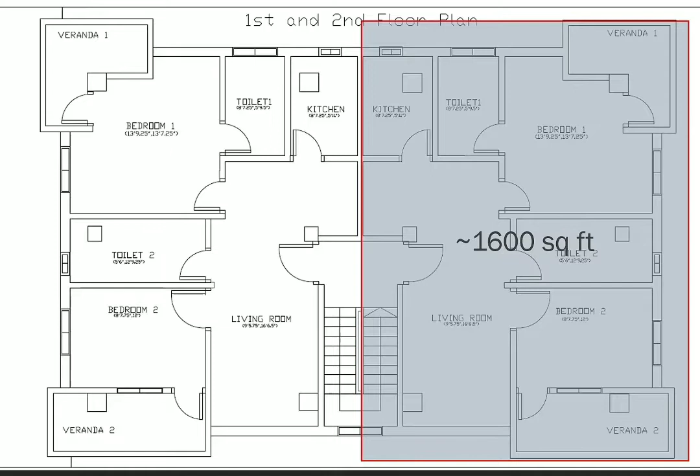For each unit, we have a master and a regular bed. We have two toilets, one kitchen, proper drawing and dining spaces. We keep a veranda and adequate windows for each room for proper ventilation. We also have stairs in this model.

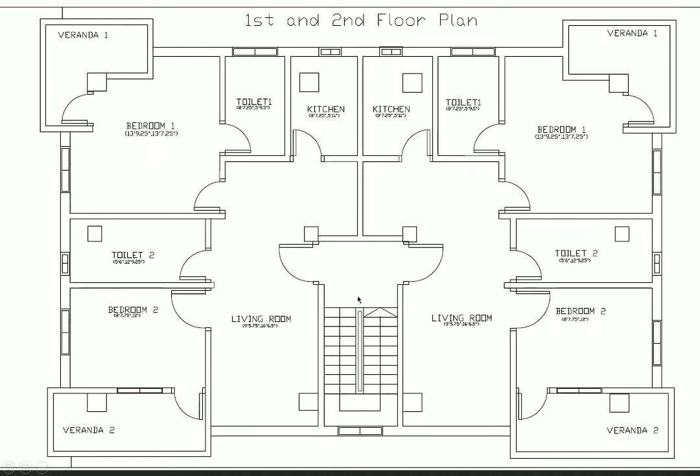Besides, in our ground floor, we are told to keep parking spaces for each flat. As we know, we need 17 feet by 20 feet free spaces for each car. We made only two big spaces for the cars. But we have more space to keep light vehicles like cycle, motorcycle, etc.

We also keep one guard room, one toilet room in basement. We also try to keep a sitting space beside our main gate.

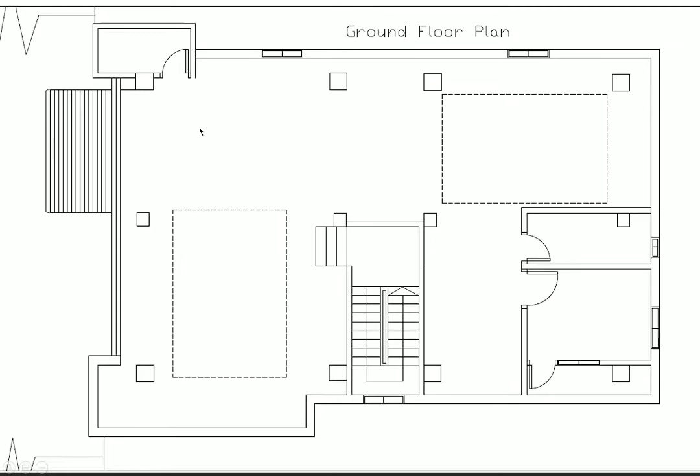We will proceed now to our next topic, which is fittings and fixtures. So an electrical fixture is a product that is used for fitting various electrical devices like lights, fans, etc. For example, wall brackets, switchboards and power sockets. An electrical fitting is any kind of electrical appliance that fits in various fixtures. Example, tube light, TV and electric fan, etc.

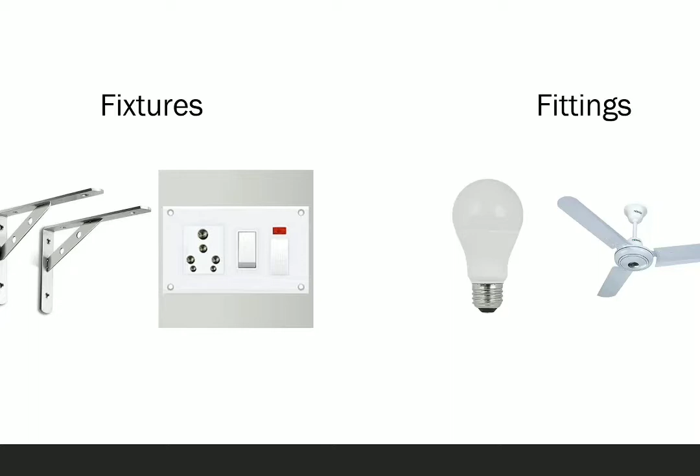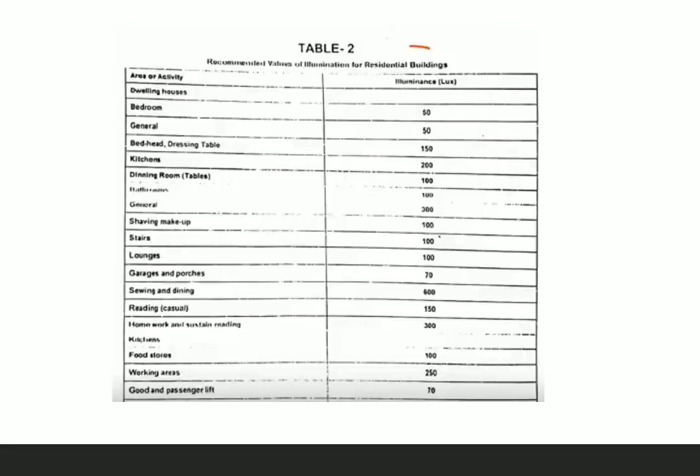So for fittings and fixtures, first of all, we measured the floor plan dimensions including height and width, etc. On the next step, we calculated the number of fittings. For this, we created an Excel file. So we checked on the recommended illuminance for different types of rooms. We used the data from EnergyPac's website for 12-watt bulbs and 18-watt tube lights for the wattage and the lumens, etc. The calculation of the number of lights and fans for each room was done using the formula in Excel.

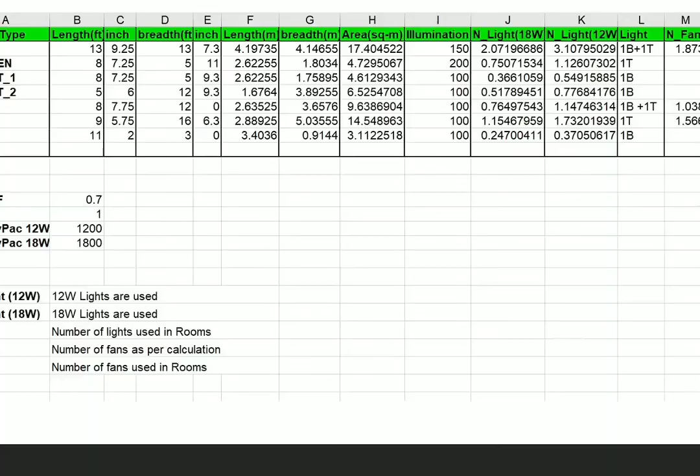So after finding the data, Ishani, ID 131, made the required symbols in AutoCAD to be placed on the floor plan. It is important to note that besides the mathematical results, we had to also take into account our observations of fittings and fixtures, like our surroundings and intuitions.

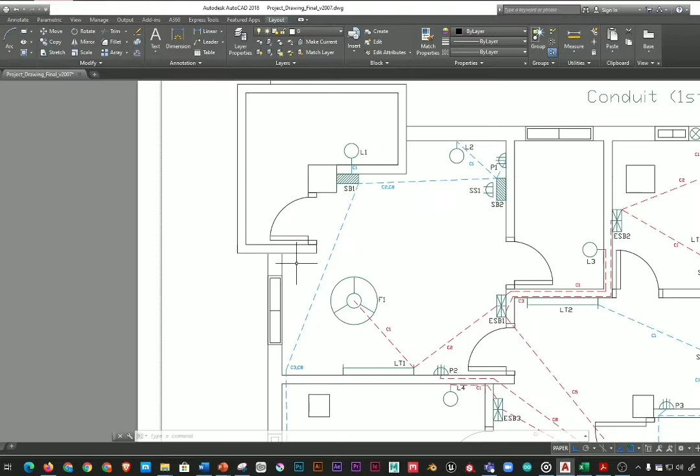For example, in this bedroom, the calculation gave us the result of 1.87 fans, but normally there is not more than one fan in a bedroom. So we placed the fan in the area of the bed and added some switchboard sockets or power sockets where a table can be placed, so that we can use a table fan there. So we took into account the same intuition for the rest of the rooms.

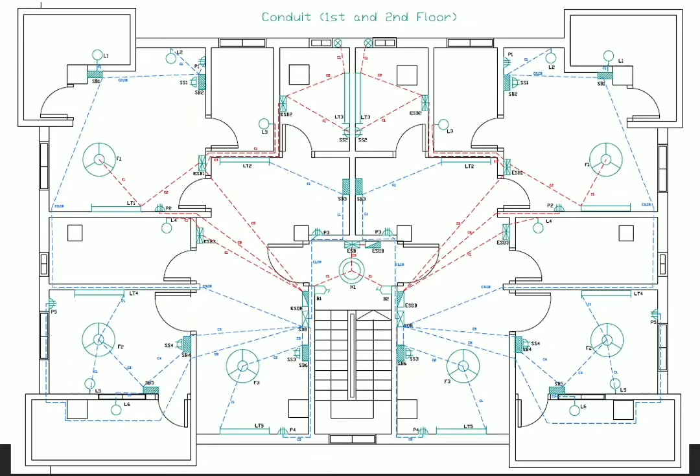We can see here the first floor and the second floor conduit design. SDB lines were colored blue while emergency lines were colored red. Our priority was a neat and clean design, and so we prioritized that two wires don't cross each other. Therefore, we drew wire connections from the walls. Sometimes we had to add switchboard connections with power socket connections due to limited space and maintaining a neat design.

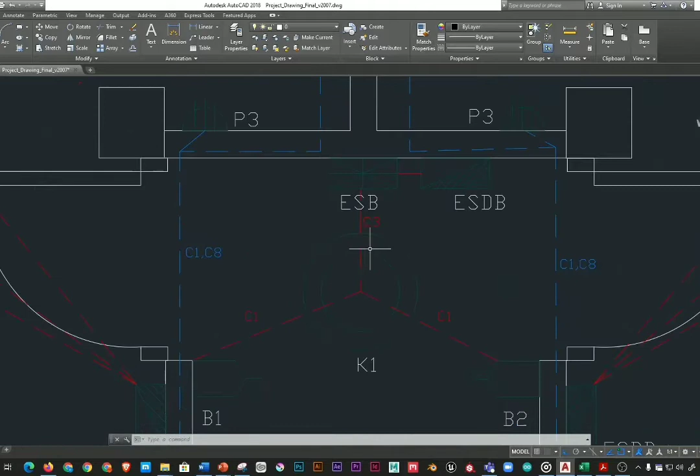Besides, wires of all security related lights and other appliances were connected to the ESDB. Emergency lines were used because we prioritized security. We considered that security lights would stay on for a long duration, and if we had connected it to only one unit, then only that unit would have to pay the bill.

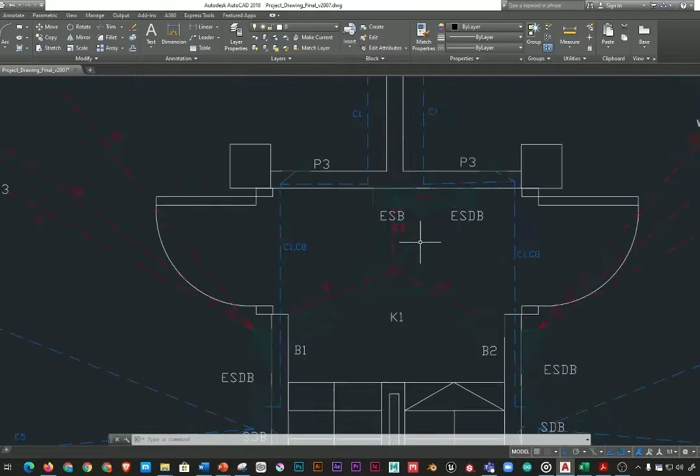We will now proceed to our next topic.

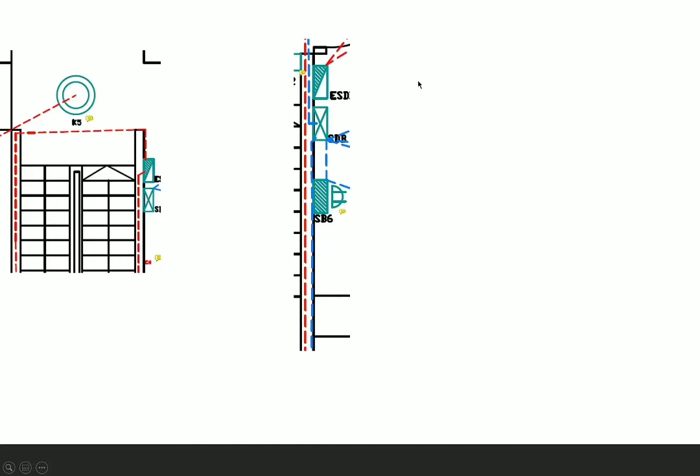Once these were done, we moved to the calculation and connection diagram part. The calculation was done jointly by Sumaya Alom, ID 172, and Isha Jahan Moon, ID 176. So at first the calculation of the conduits was done, and it was found that the conduits required in all the cases had 2 × 1.5 rm BYM plus 1.5 BYA ECC.

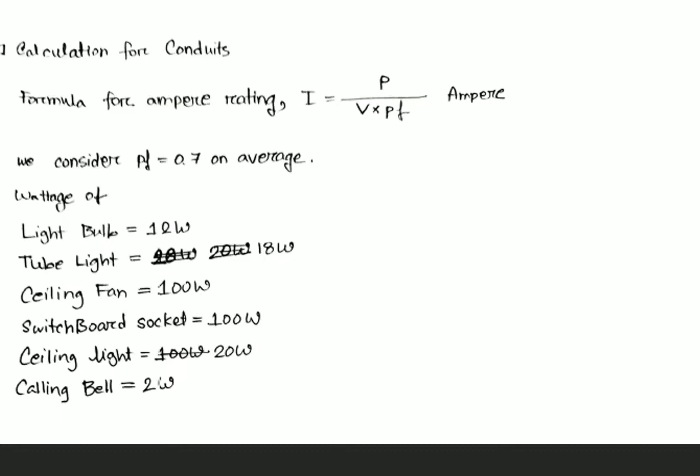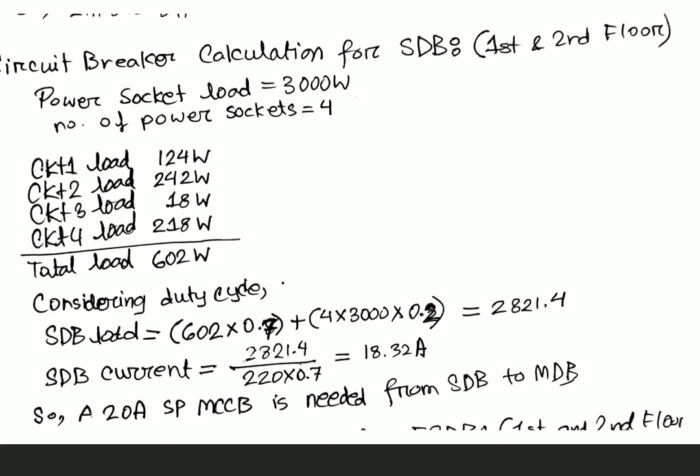Next we did the circuit breaker calculations for the SDB and ESDB to MDB and EMDB connections respectively. Here we can see the SDB and ESDB connections; we have done this for the first and second floor, but we also had to repeat this process for the ground floor and the staircase.

Once the results were done, we moved on to the calculation of the EMDB, and once the EMDB part was done, we moved on to the MDB. It is important to note that we are using a three-phase connection here, and this is why we have to use the line voltage, and in our EMDB current we have to divide by √3.

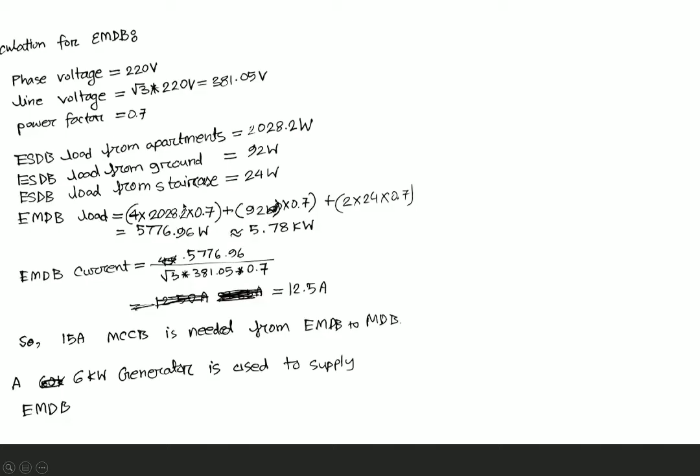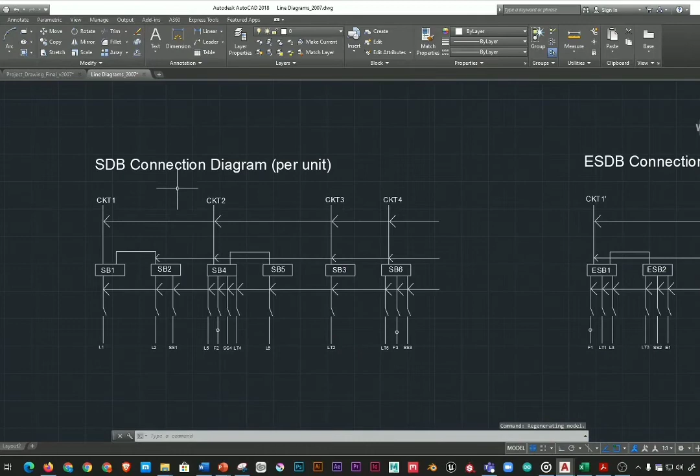Once these were done, we finally moved to the last part of our project, that was the connection diagram and wiring diagrams. This part was done jointly by Sohala Rao Sala, ID 184, and me, ID 175. The line diagrams were based on each and every room. As you can see here, this is the SDB connection diagram per each unit or apartment, and we did the same process for the ESDB connection diagram.

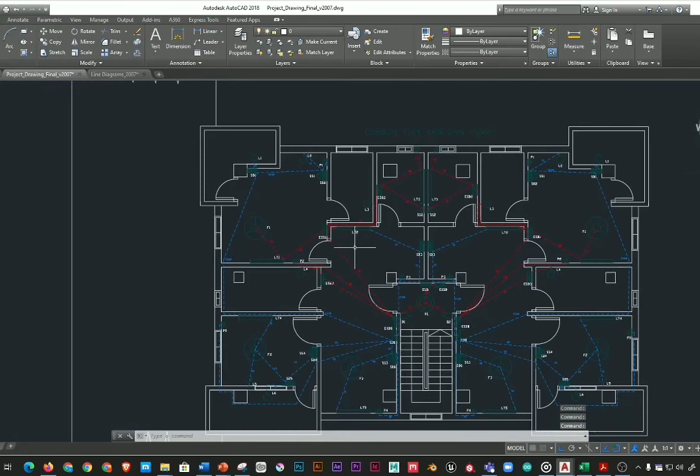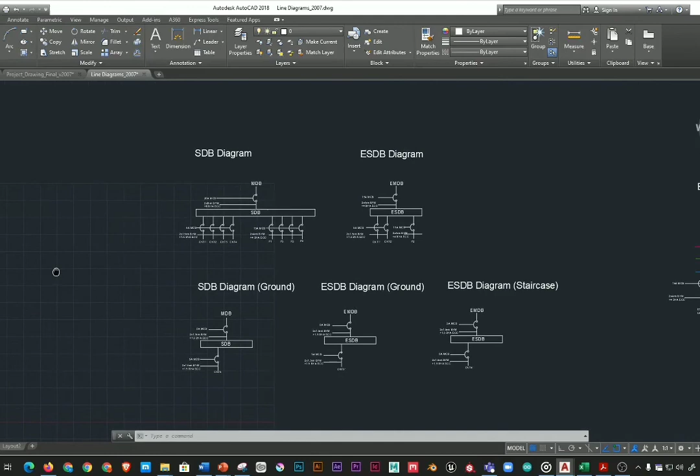Once that was done, we had to do the same process for the ground: SDB connection diagram for the ground, ESDB for the ground, and ESDB for each of the staircases. You can see here that there are some emergency lines that Prova talked about, and because we had to use emergency lines, there was also an ESDB on each floor in the common area between these two apartments. Once those were drawn, we moved to the SDB to MDB diagram connections, and they were done based on the calculations that Sumaya and Moon provided.

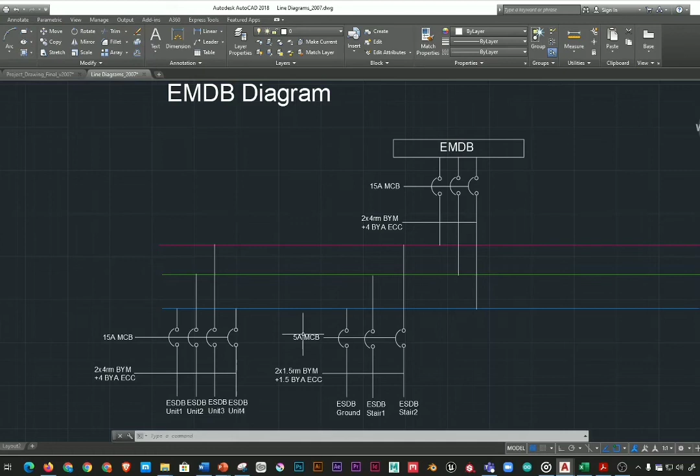Once these were drawn, we moved to the EMDB connection diagram, and in the EMDB connection diagram we also used Sumaya and Moon's calculations to put the values of the required circuit breakers and the required values of the wires. And once that was done, we finally made the MDB diagram, and once this was done, we concluded our project.

After doing the project, we conclude that as electrical engineers we have a role to place fittings and fixtures keeping the comfort of the people in mind. We cannot place as many appliances as we want, as we also have to consider the limit and the economy of a certain home. We have learned how a connection from the grid enters our homes from doing this project.